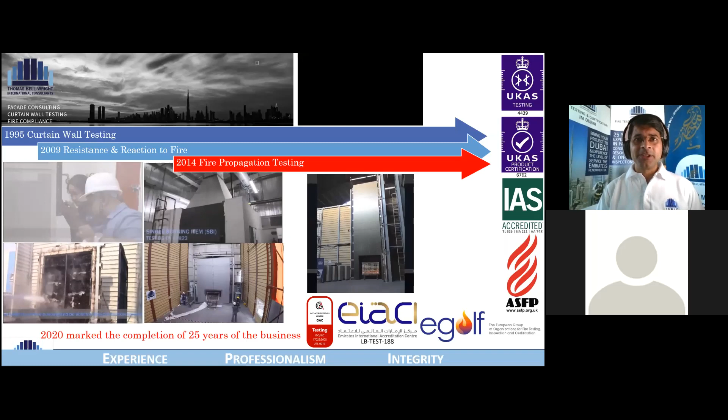A little over a decade ago, we ventured into fire testing, very exciting work, starting with a furnace to do fire resistance testing and some reaction to fire tests as per the ASTM E84, or the Steiner tunnel test. Over the last seven odd years, we have had an extreme focus towards conformity of materials for cladding, for building envelope, interior finishing, as well as passive fire protection, and have expanded heavily. We currently have four fire resistance testing furnaces, including two large ones, four meters by five meters, horizontal and vertical, with load bearing capability.

We are also probably the only lab in the world which can test to the NFPA 285, the ASTM 2307, the BS 8414. All of them are large scale fire tests or fire propagation tests to validate the behavior of cladding systems the way they are implemented.

So with that as a background, let me begin today's session. We continue our journey towards better understanding and comprehension of passive fire protection as well as conformity. And unlike the last 2 episodes where we were very focused and talking about specific test method groups, as well as materials, in today's session, we take a bird's eye view, a broad view, to develop a very good understanding of how we ensure fire safety.

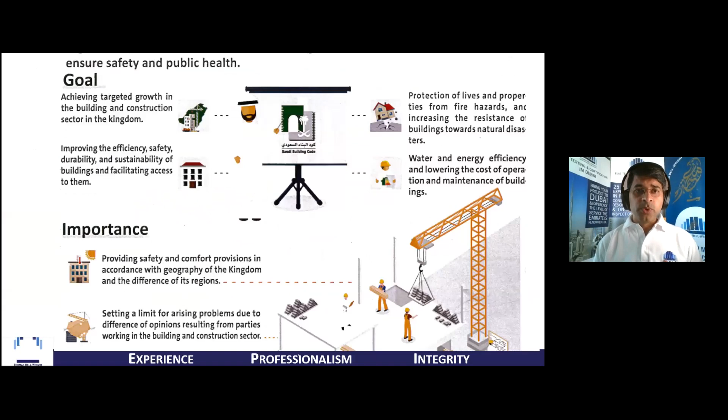What are these codes, what do they do? Let's look at the aim of these codes. The aim is to bring a cohesive approach to ensure the vision of infrastructure growth is fulfilled effectively. As a country, they chose to take on a code which is already evolved to a certain level.

People who are in the kingdom, or who have lived there in the past, would know there was a time when there were two electrical supplies - in a house you would have a 110 volt line and a 220 or 230 volt line.

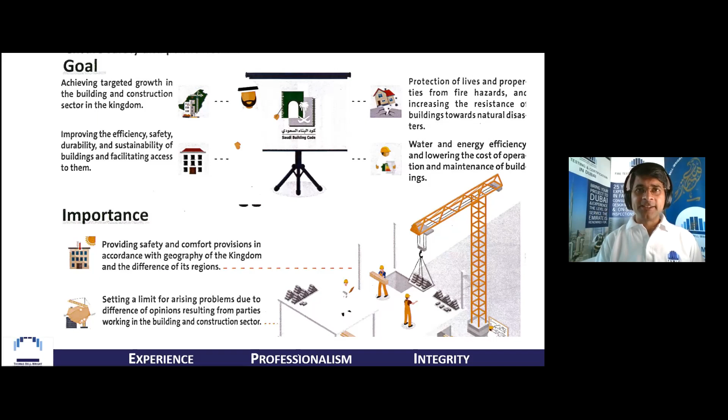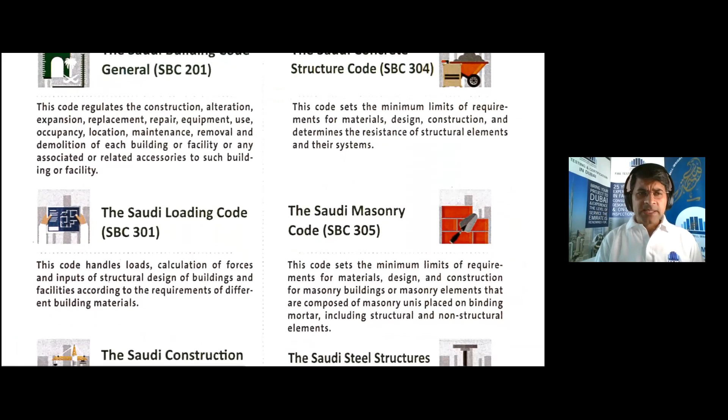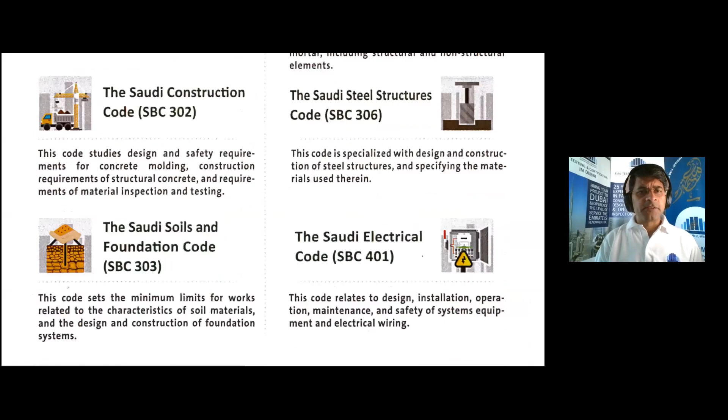So a country with past learning and experience of mixing different codes or methodologies took that learning and decided to adopt a code which is all-encompassing. The code is a publication of up to 10 or 12 different codes, starting from the general code, concrete code, loading, masonry, construction code, steel structures, soils and foundation, electrical code - a fairly comprehensive list, 10 or probably 12 different publications.

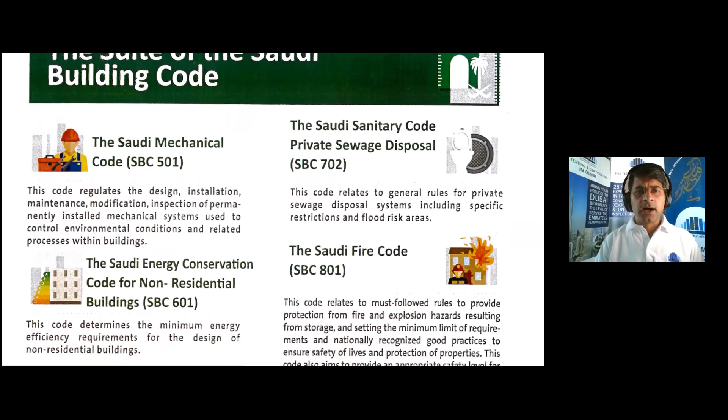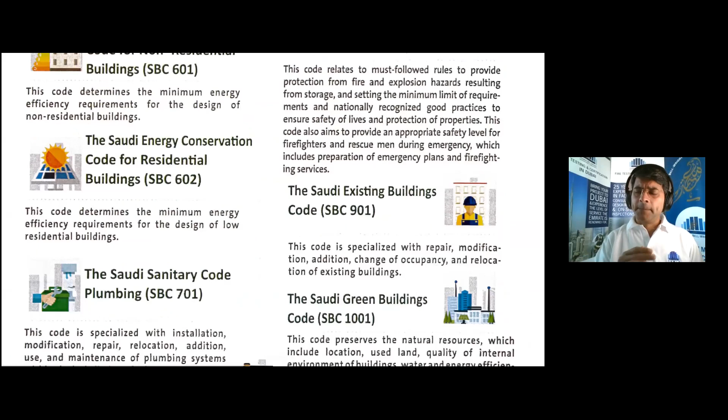And the aim is that all of these different publications, which are guiding on how to ensure fire safety, energy conservation for residential, commercial, etc., they all speak the same language. It is a large group of basic requirements that have come to be. And the key reason for such a broad structure to come from a single source is very, very beneficial as a large country where the implementers of the code will be spread across different government bodies.

It is important to know that unlike UAE, the owner of the building code is the SBCNC, which is the Saudi Building Code National Committee. It is not any authority. There is a separate entity outside, which is kind of formed out of SASO, which is Saudi Arabia Standards Organization, who has been tasked to publish this code as well as maintain this code, which means in the years to come, this code can evolve and will evolve and localize.

There are three key government entities who are responsible for implementing the building code. The first is MOMRA, or Ministry of Municipal and Rural Affairs, which is like the municipality. They are the first entity among the three entities who are responsible. They are usually the prime stakeholders of any infrastructure, and they are implementers of the building code, all the building codes.

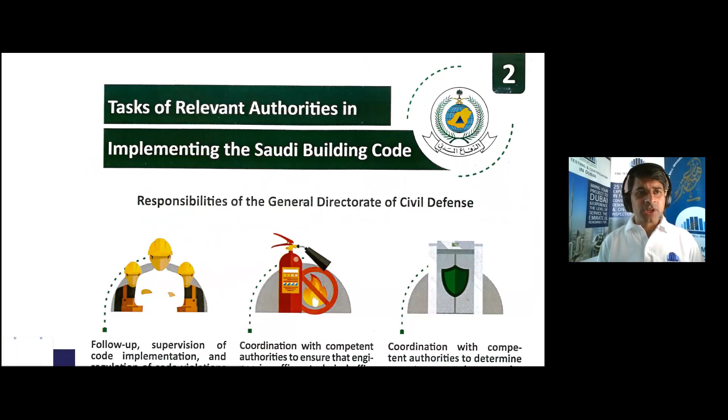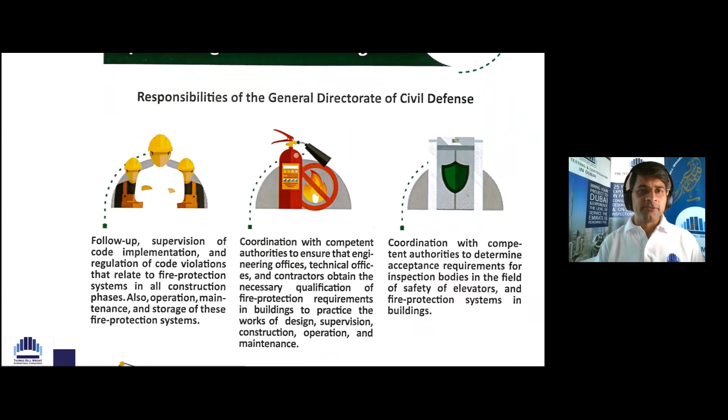The next is, of course, when it comes to fire safety, we have the General Directorate of Civil Defense, who is going to ensure that several aspects which are related to fire safety are brought about in the correct sense. There are responsibilities which are clearly defined of each government department of how they will be implementing the complete bouquet of codes.

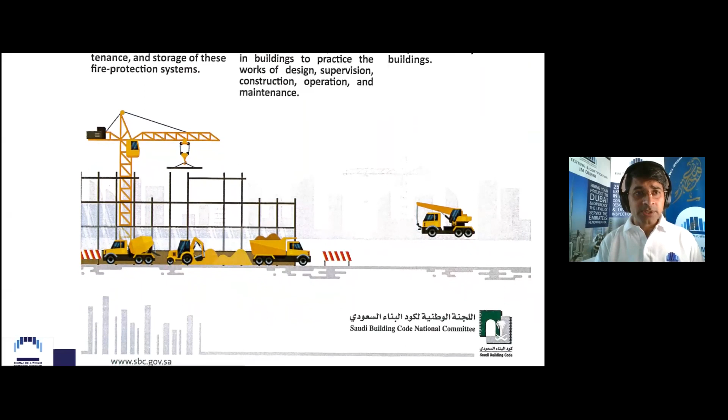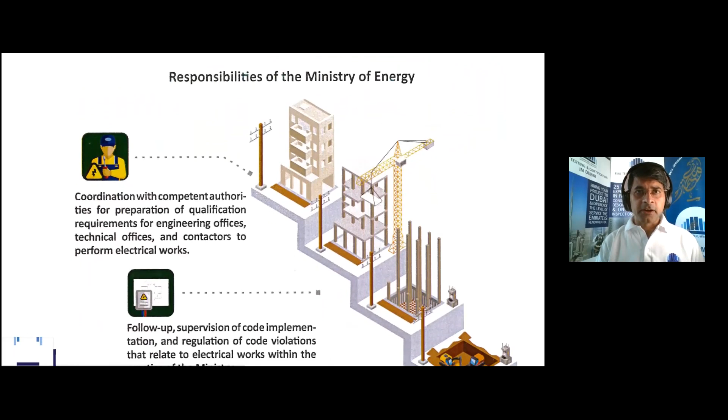And the third is an authority which is not the electrical authority, but the Ministry of Energy, because we understand, and people know this fairly well, that there are many other means of energy generation, electricity generation, that are coming to be and are coming to fore. And hence the Ministry of Energy is also one of the three key implementers of the wide spread of the building codes.

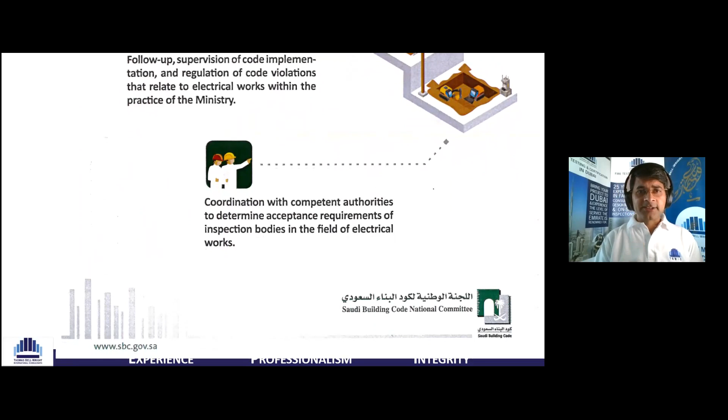Now we understand that unlike UAE, the holder or the owner of the building codes is a separate entity, and the implementers are three separate ministries. Now, to understand how the conformity to the code will roll out in a very different stance in Saudi Arabia. As we said, the requirements are implemented by three separate government bodies. And these requirements are mostly to do with what needs to be done, how it needs to be done, where it needs to be done, etc.

There are already certain laws and decrees in place to implement and enforce the requirements written across these publications or building codes. And there will be many more decrees and regulations that will be published in the times to come to start enforcing and coming up with legal mechanisms which define and explain how these will be implemented. A lot of these robust implementations will help the growth aims and targets of the Vision 2030, and various non-existent laws or laws that are very, very important will come into play in the times to come.

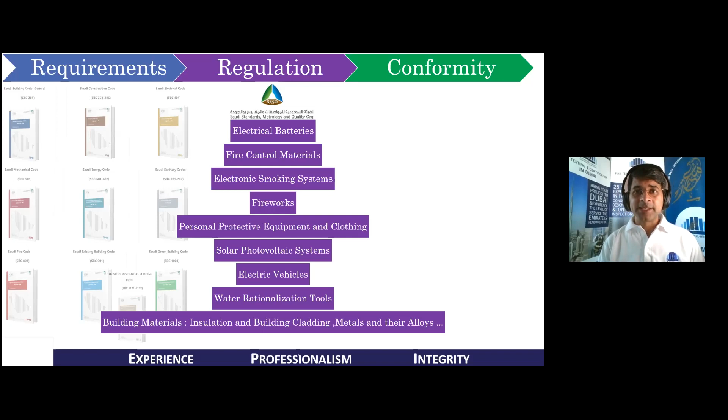And what you see on your screen in the center are some of the several technical regulations or laws that are already enacted and in place. The technical regulations or laws mean that the products which are listed in these technical regulations are controlled. There is either a mandatory or a voluntary conformity scheme that exists for all the technical regulations that have been currently published. Some of you may be familiar with the SQM or the SASO quality mark, which is mandatory for certain product types and voluntary at this stage for certain types of products.

And the way the conformity is implemented in the country is that for certain product types where it is mandatory, you need to have a product certificate of conformity.

And in those cases where a product certificate of conformity does not exist, you can attain a shipment-based or per shipment certificate of conformity, which will allow you to export or import the product into the kingdom. There also exist other conformity mechanisms or third-party certification programs which are available to various members who need to use conformity mechanisms to ensure conformity of products and materials.

I hope this gives you a good picture of how this is, and we will take, of course, some of the questions later. But now, as we understand risk assessment, which needs to be done or is done sometimes to ensure that fire does not happen, we understand how 2 countries have written and implemented some of the minimum requirements for building codes, as well as how these 2 countries have 2 very different mechanisms to validate and ensure conformity of products and materials that exist. So let's look at how the tools of testing and compliance and conformity assessment are implemented and what may be the current gaps and how these gaps are fulfilled.

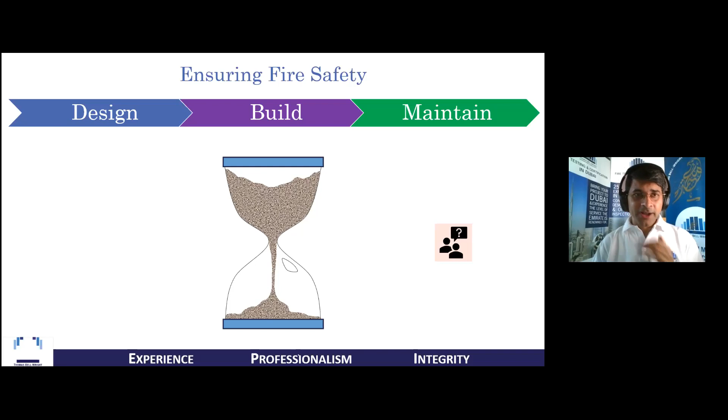Let's look at how this works. What is the problem? While everybody races the timeline of ensuring that the project is completed within time, within budget, there are some lags and leakages. At the outset, we need to start when we are designing to mitigate and ensure the provisions exist in the specifications, in the building code, in the contract, to make sure that all the foreseeable fire risks are taken care of.

And the building codes are often the first starting point, but for several types of occupancies or several types of buildings and construction, which might be unique, which might be a first time, there needs to be an additional effort put in place to ensure that the right and correct specifications and compliance requirements are put in place. And while the construction is on, it is equally important that those correctly written requirements are being implemented correctly.

Compliance of products and materials is being verified. Compliance of installation mechanisms is being verified, and there is good and clear documentation, because once the building is handed over, once the construction is completed and people are gone, the FM companies need to come in, the people who need to use the building come in, and there needs to be a very good understanding of what the original idea was, to ensure if such a fire happens, how it will be taken care of.

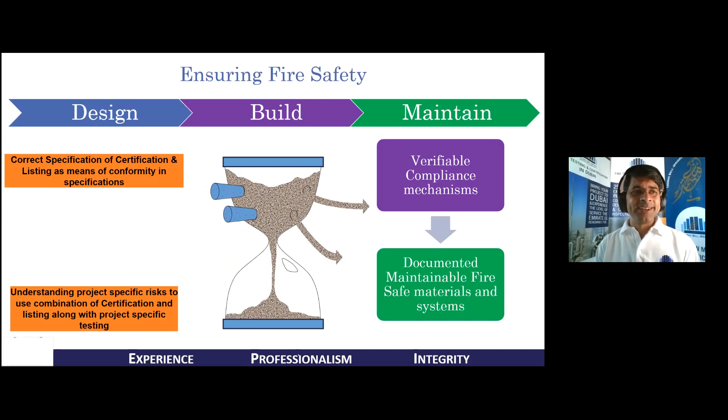And nobody really wants all those means and mechanisms to be thrown out of the building and the building altered and eventually becomes a different kind of building. So what do we do to ensure that these things do not happen? We need to plug the gaps. Correct specification of certification and listing as means of conformity needs to be in place.

I have spoken in several technical sessions in the past. Many of these are now available on our YouTube page. If anybody in the audience is keen to understand how different conformity assessment mechanisms operate and how they can be validated, there is more information available.

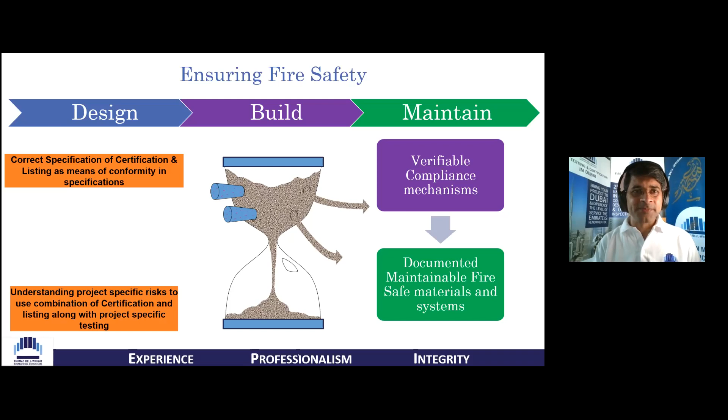Also, it is important to understand that the project-specific risks for certain occupancies may require project-specific tests. We need to have well-trained or probably third-party inspectors who can distinguish and understand what is a qualified, certified, or compliant product or material. Is it being installed correctly or not? And of course, as mentioned, all of this needs to be documented well to preserve all of this information and the strategies throughout the life cycle of the building.

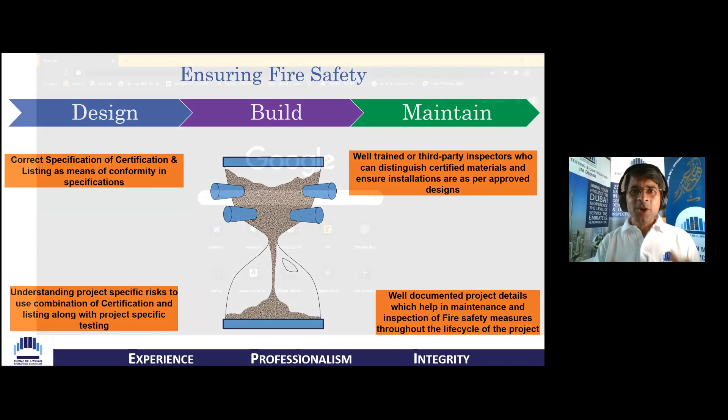In the past I have talked about how you can check and validate whether the products and materials reaching the sites are complying or not, and about certification mechanisms, not just from Thomas Bell-Wright as a certification body, but several other third-party certification bodies who have created mechanisms for installers, inspectors, contractors to make sure that whatever material was given in the project specification is exactly the same material that is reaching the site. Not just the same material, but even how the installation needs to be done is available and valid.

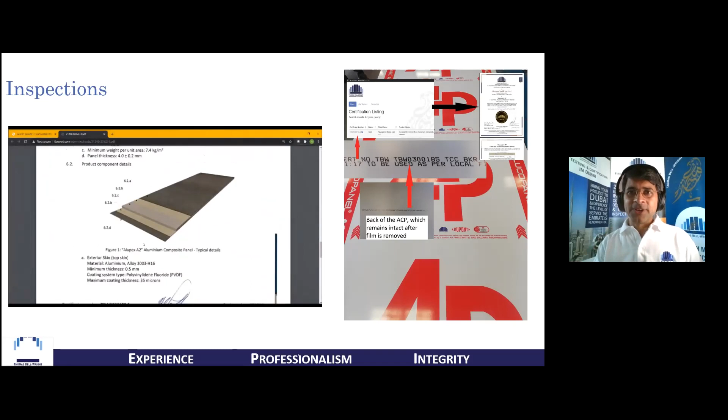The same goes for a large variety of products and materials. Here is an example of aluminum composite panel. On the image on the right, you can see a small ticker tape which lists the certification number. And this certification number can be validated on the directory of the certification body. I must share an example. I think I touched on the ACP requirements, that the aluminum composite panel requirements in Saudi Arabia in the technical regulation are different from the requirements set in the building code.

And hence it is very, very critical that whoever is taking on the liability of ensuring that the building, the construction that you're doing, the design, as well as the implementation, everything is complying to some of the minimum requirements that have been put in place. So as I end today's session, I feel that there is a lot of importance that we all need to pay to the specifications and contracts that are written in place.